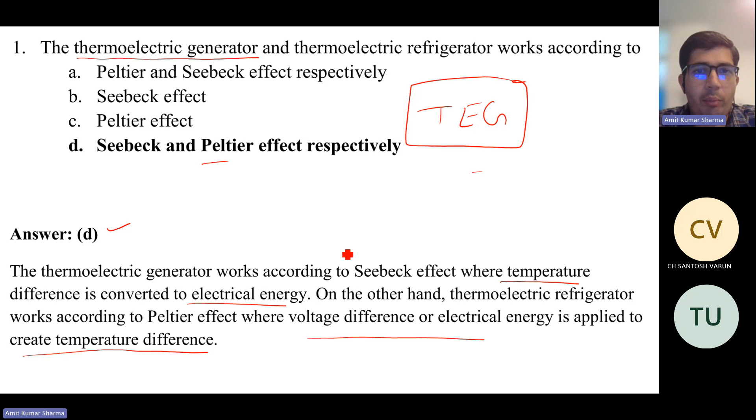On the other side, in the Seebeck effect, we are generating electricity from temperature difference. If you want to look into more, you can go back to the previous week's classes where we discussed the complete theory of the TEG, thermoelectric generator. Okay.

Figure of merit Z for a TEG is a function of: the temperature difference between the hot and cold side, the material properties, the magnetic properties, or all of the above. Let's think about it. So it's option B, material properties. Option B, it seems so.

But my doubt is, the figure of merit is the ratio of the Seebeck effect to the summation of the thermal conductance and the resistances, right? If that is the case, we'll have geometry also as one of the functions. In resistance, we'll have resistivity into length by area. So I think geometry should also be there, but in the options it's not provided. Am I right or not? Correct me if I'm wrong. I don't remember the exact formula for the figure of merit. Okay, no issue.

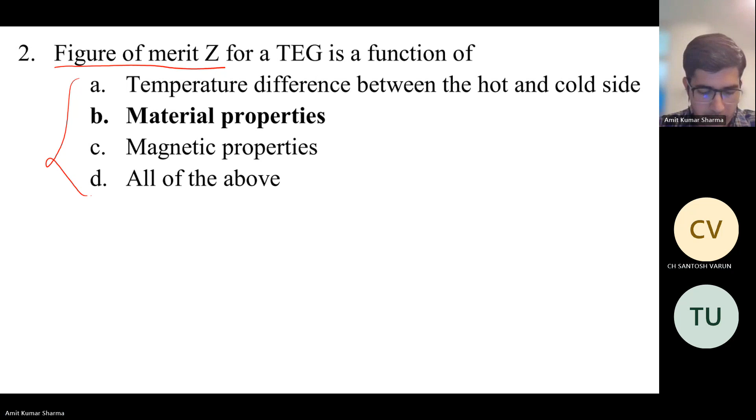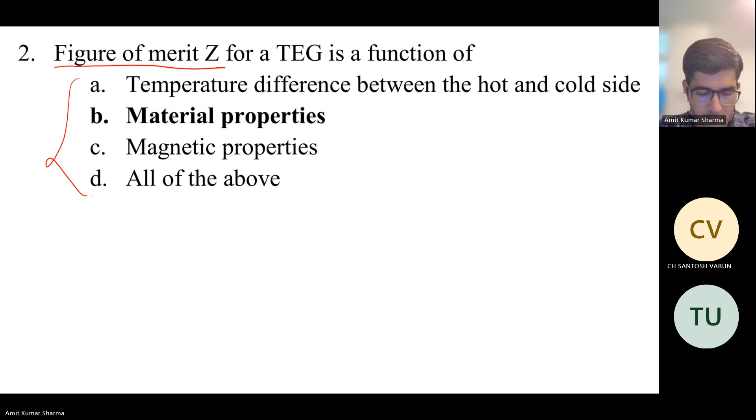Let's see the answer. The figure of merit is dependent on the thermal conductivity, Seebeck coefficient, and electrical resistivity, which come under the material properties. So option B is correct. And the thermal conductance and electrical resistance also depend on dimensions. So basically it also depends on the geometry. Okay.

So basically, they are taking the dimension property into the material part itself, because conductivity, Seebeck coefficient, and electrical resistivity come under the material properties, and these are dependent on dimension. So if we say material properties, we are considering thermal conductivity, Seebeck coefficient, and electrical resistivity, which already include the dimension. That's why they have not mentioned it separately, because it's an integral part of these.

So basically, the figure of merit Z you can consider like the efficiency for the TEG. It depends on the material properties, basically on thermal conductivity, Seebeck coefficient, and electrical resistivity. For the complete relation, refer to the class notes where you can see the complete derivation. Come to the next question.

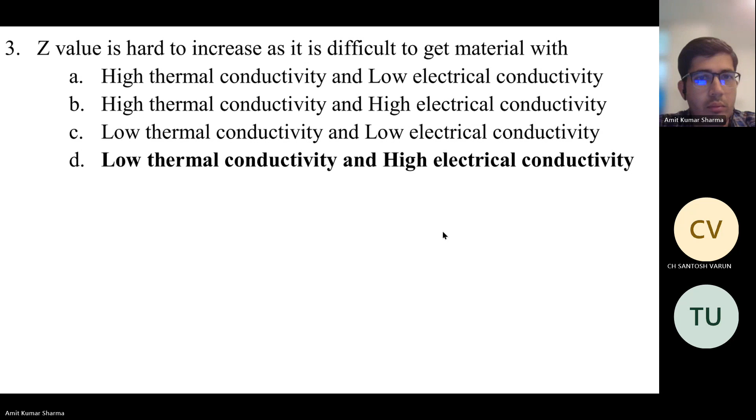Okay. So the answer is D, because the expression for Z shows the electrical resistance and thermal conductance in the denominator. So the point to be noted is that electrical resistance and thermal conductance are in the denominator. So hence to increase Z, we need a material with high electrical conductivity and low thermal conductivity. Such materials are hard to find naturally.

Okay, so as these are in the denominator, if we want to increase Z, then we need a material with high electrical conductivity and low thermal conductivity. So the denominator value will decrease and Z will increase. Okay.

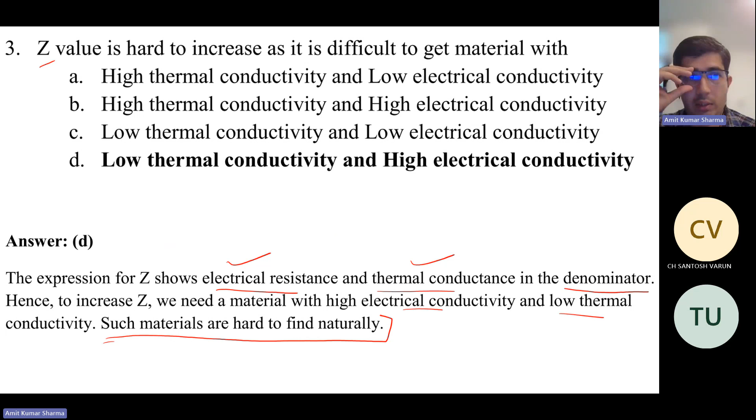If Rp and Rn are equal to 1.5 and 1 ohm respectively, then which of the following is true? Option A: external resistance of 2.5 ohm results in maximum efficiency. B: external resistance of 2.5 ohm results in maximum work output. C: external resistance of 2.5 ohm results in both maximum efficiency and maximum work output. And D: external resistance of 0.5 ohm results in maximum work output.

First of all, you should know what the external resistance formula is, basically what Rp and Rn are. So it should be 2.5 ohm, option A. Why? Because for maximum efficiency, the M value, the ratio of the external resistance to the resistances of the P and N semiconductors, should be equal to 1. So RL should be equivalent to Rp plus Rn. That is 1.5 plus 1, it's 2.5. Yeah, nice. Let's wait for maybe 1 minute if anybody else wants to answer or discuss it.

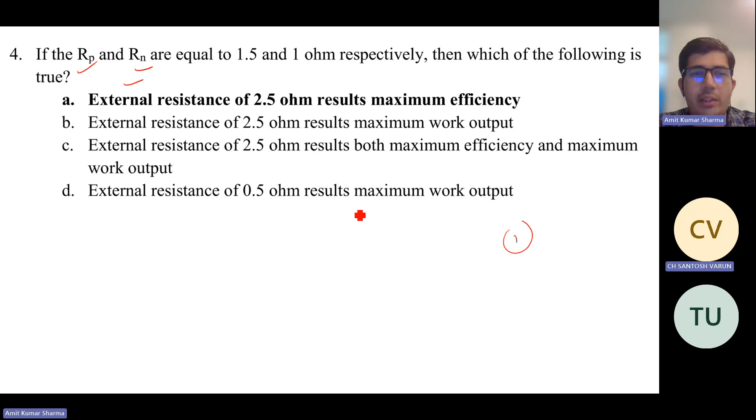Varun, when is the exam? Do you have any idea? It's on October 28th. Okay, October 28th. It's like 5 more weeks to go. It's like a 12-week session, I think, right? Yeah, 12-week session, and at the end I will take one more revision class to sum up all 12 weeks. In that, we will discuss maybe some concepts, and we can also discuss something else. So after 12 weeks there will be one more class. Okay. By then we should be ready with all the things. All the first weeks are gone already, so we should recap. It's a mechanical thing, it's fine. But after week 8, it's completely new concepts again.

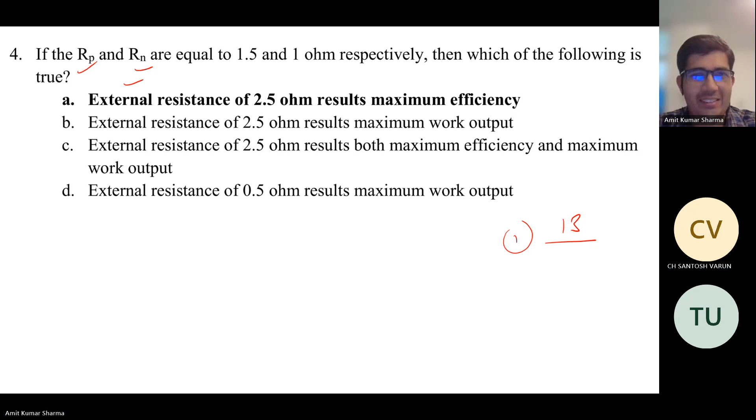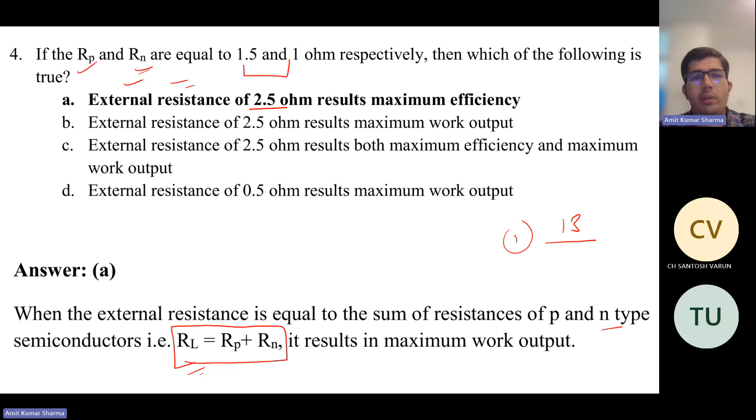Okay, let's see the answer. So the answer is A. Basically, when the external resistance is equal to the sum of the resistance of the P type, that is Rp, and N type, that is Rn, so RL equals Rp plus Rn, it results in maximum work output. So for maximum work output, the external resistance should be the sum of the P resistance and N resistance, and that will result in maximum efficiency. So it will be 1.5 plus 1, 2.5. So it will deliver the maximum efficiency.

The efficiency of an MHD process is limited by: we have 4 options: length of the duct, ionization potential of the gas, below 2000 Kelvin the gas molecules become neutral, thermal conductivity of the gas.

Oh, I think this question is entirely out of my box now. Yeah. So MHD is basically a magneto-hydrodynamic generator. It's quite new for me also, actually. I should have watched those videos and come to this session, but due to the time constraint, I was unable to manage today. So basically, MHD is a magneto-hydrodynamic generator. Okay.

So at the end of this class, we are having around 10 questions. After that, we will discuss all these technologies that have been taught in the class. Basically, just go through it.

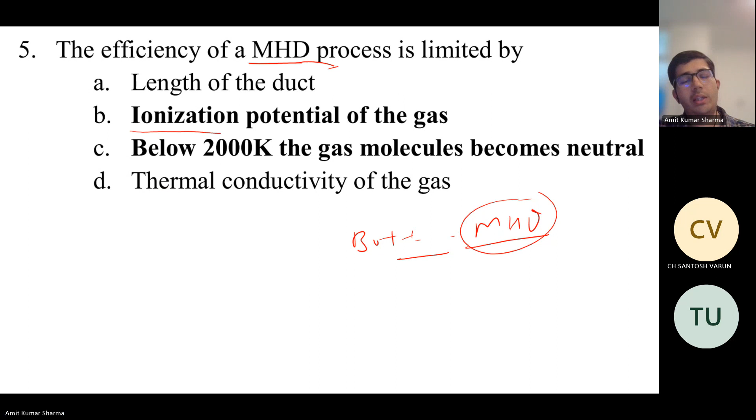After that we will use that gas, or you can say that heat, in the boiler to generate the steam and further to run the steam turbine or gas turbine or any other cycles. So basically the main funda of why it is coming in the waste heat recovery topic is because today we have furnaces that can go up to 3000 Kelvin or very high temperature, but the turbine inlet has some limits.

Okay, so the inlet stream going to the turbine, or to any other equipment, also has some temperature limit due to metallurgical conditions. We cannot go beyond maybe 1500 Kelvin or 1900 Kelvin like that. But in the furnace, we can go up to 3000 Kelvin. We have those furnaces available in the market. So that's why it is used as a topping cycle.

So first we heat our gas to a very high temperature, then we put the MHD, and that gas will go through the MHD and generate some electricity. After cooling to the required temperature, it will go to the other cycle. In this way, we can recover the energy that can be converted into electricity. That's why it is coming under the waste heat recovery topic.

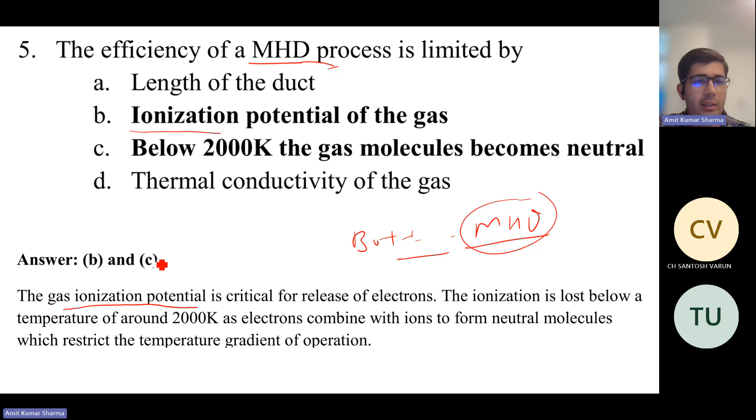Let's see the answer. The gas ionization potential is critical for release of electrons. Okay. The ionization is lost below a temperature of around 2000 Kelvin as electrons combine with ions to form neutral molecules, which restricts the temperature gradient of operation. So basically, for this system to work, we need ions, not complete molecules. And ions will be generated if the temperature of the gas is more than 2000 Kelvin, or nearly 3000 Kelvin. So we require very high temperature for this.

Okay. So the efficiency will depend on the ionization potential of the gas, and below 2000 Kelvin, the gas molecules become neutral. If this is the case, then the efficiency will come to zero or the system will not work. So B is also very important, because this is the potential that defines the efficiency of the MHD process. So options B and C are correct.

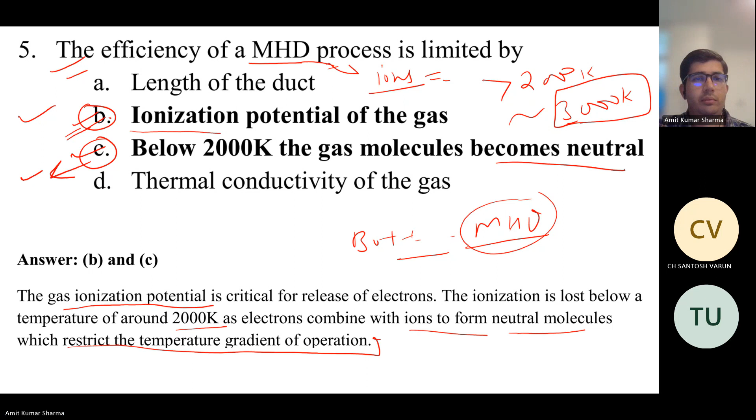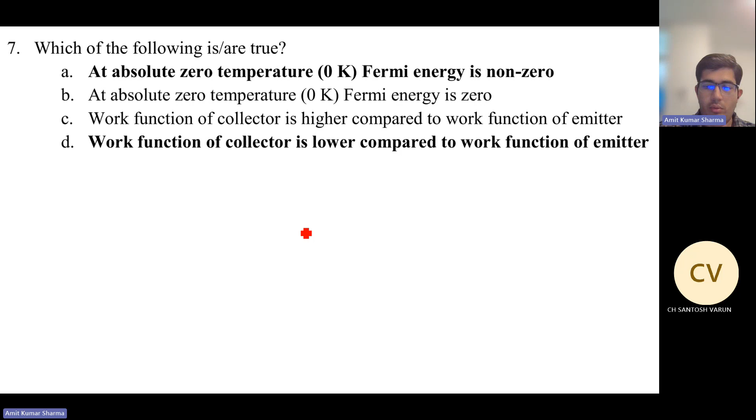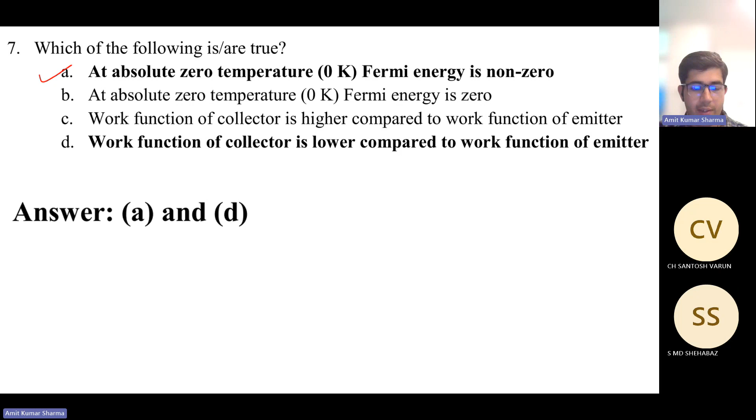Okay. So basically, Fermi energy is a concept of quantum mechanics referring to the energy difference between the highest and lowest occupied single particle states in a quantum system of non-interacting fermions at absolute zero temperature. So at absolute zero temperature, is Fermi energy zero or non-zero? See the answer. Fermi energy is non-zero at absolute zero temperature. So option A is correct. It will be the energy of the highest occupied single particle state at 0 Kelvin.

And the work function of a collector is lower compared to work function of emitter. So if there is a collector and there is an emitter, then the work function of the collector is lower compared to the work function of the emitter. Okay. Let's go to the next question.

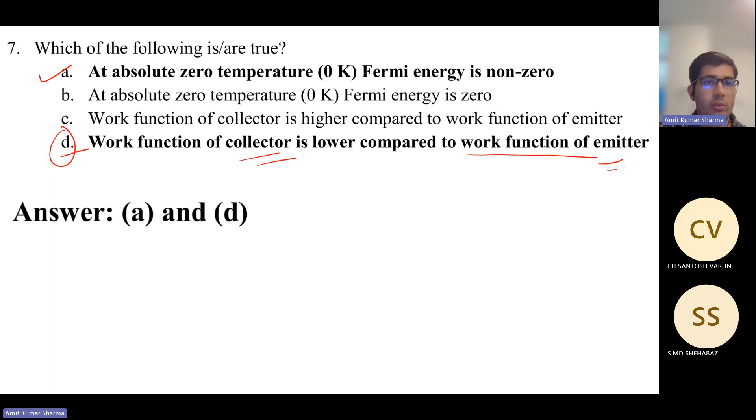In a power plant with hot gases coming from combustor at 3000 Kelvin, one can use an MHD, a TPV, and a TEG. Before using the gas in the steam generator, what should be the order of these devices along the hot gas path? Very good question. Take 2-3 minutes to think about it. Sorry to disturb you, but what is TPV? TPV is a thermophotovoltaic energy converter, or you can say energy conversion system.

So TEG we already know, thermoelectric generator, and MHD we already had previously, magneto-hydro, what is the name? I also forget. Magnetohydrodynamic, yeah. So as you said, MHD should be active at greater than 2000 Kelvin only. As the energy is around 3000 Kelvin, we can go with the MHD option first. I'm sure about it, so it should be D. As you said, only above 2000 will the activation happen. Yeah, about 2000 only.

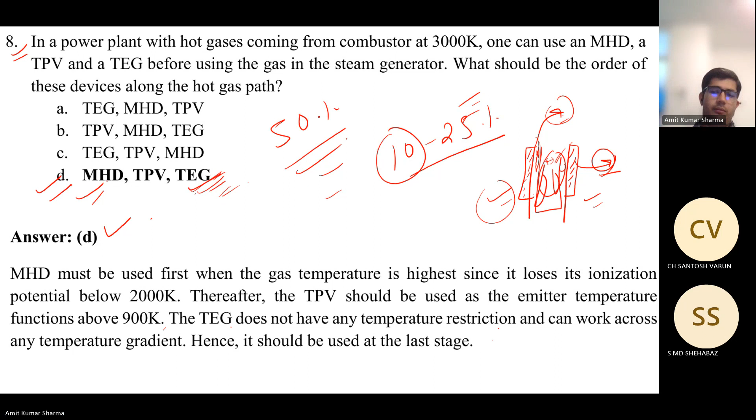So that's why they are putting so much money to come up with a design that can go up to 50% of efficiency. So it's like cook stove efficiency you're talking about. Yeah, cook stove efficiency. So today, if you go into the market, there are multiple designs available for cook stoves, but they are very costly. So the normal common man cannot afford that. So still we need so much intervention in this cook stove area actually.

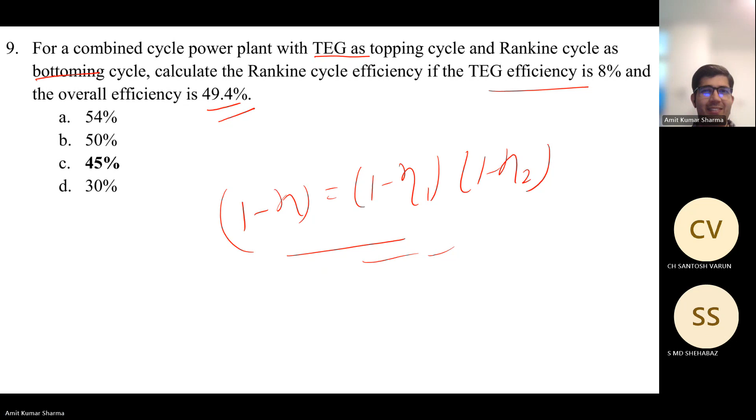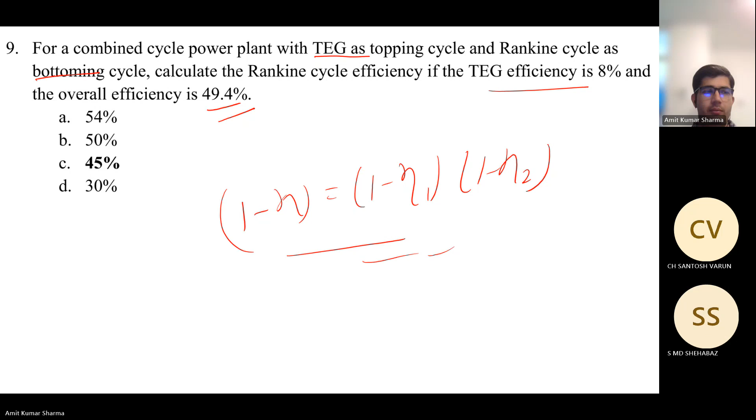Okay, so let's see the answer. The answer will be 45%. So here overall efficiency is 49.4%. So it will be 1 minus 49.4 equals 1 minus 8 times 1 minus this. So if you solve this, then you will get the answer of 45%.

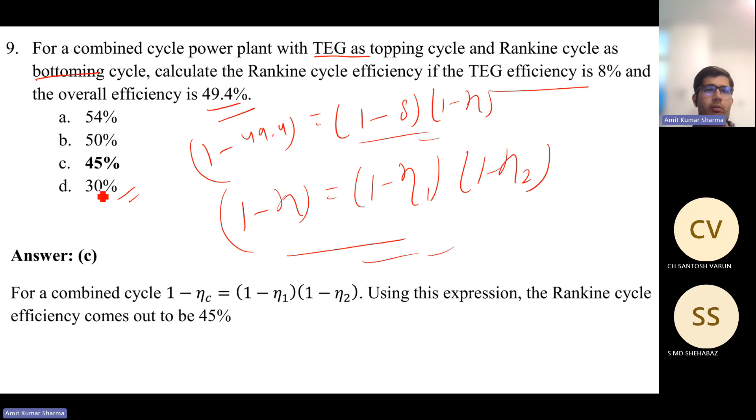A single device has a conversion efficiency of 15% over the available temperature range. Assuming efficiency to be proportional to temperature difference, what should be the resultant efficiency of a cascaded system having 3 such devices at equal temperature gradients? Okay, let's take 2 minutes. So basically, we are having some available temperature range, and if we are using only a single device, the efficiency will be 15%. And now you can assume the efficiency to be proportional to temperature difference. So what should be the resultant efficiency of a cascaded system having 3 such devices at equal temperature gradients? Now what will be the efficiency?

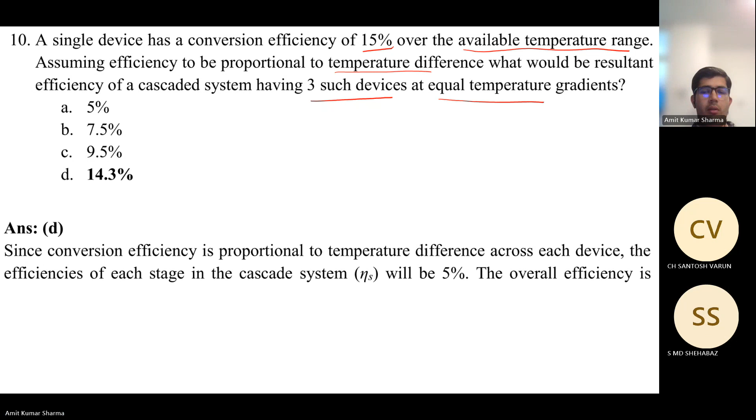Okay. So the answer will be D, 14.3%. Since conversion efficiency is proportional to temperature difference across each device, the efficiency of each stage in the cascade system will be 5%. So the overall efficiency therefore will be 1 minus (1 minus η) to the power cube. So the efficiency of each stage in the cascade system is 15% divided by 3, or 5%. Because a single device has 15%, if we are converting it into 3 devices, we are taking 5% for each device. In that way, it is 5% for each stage.

Because for the same temperature difference, if the single device is operating, that will give 15% over the temperature range. If we are assuming 3 steps, now each step is 5%, 5%, 5%. But we are using 3 devices now, so that will affect the overall efficiency. Got it.

Okay. Okay, sir. Okay, got it.

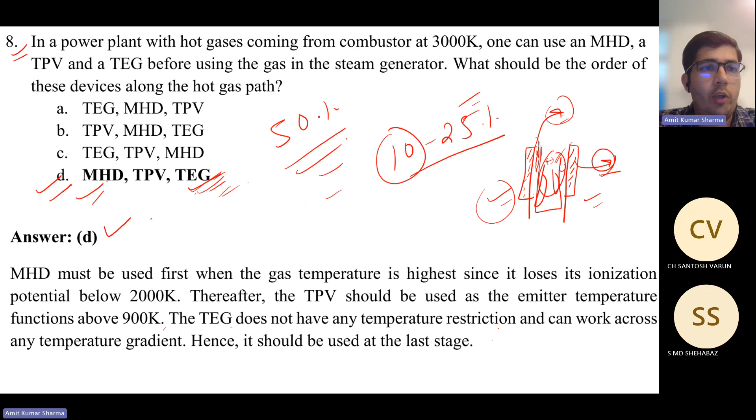So we have seen 10 numericals today. So I think first is the thermoelectric generator. Okay. If you have any doubt, let me know. After this, we are going to discuss some concepts.

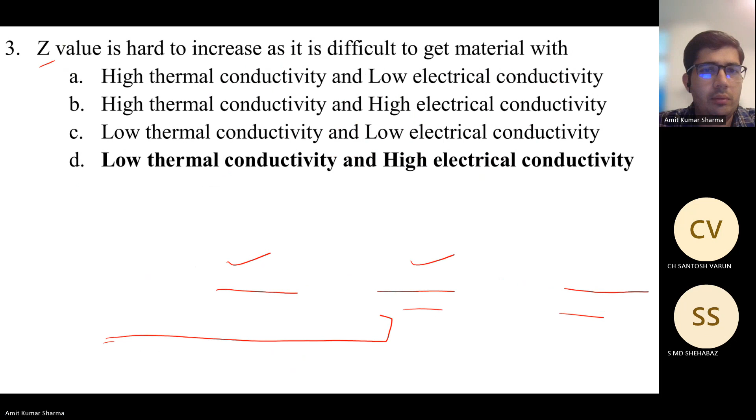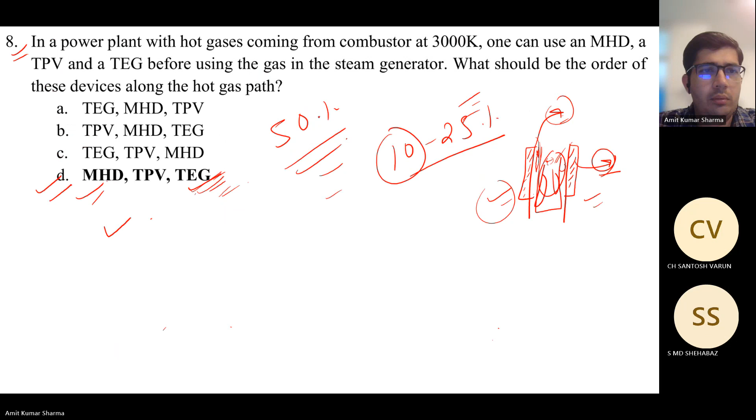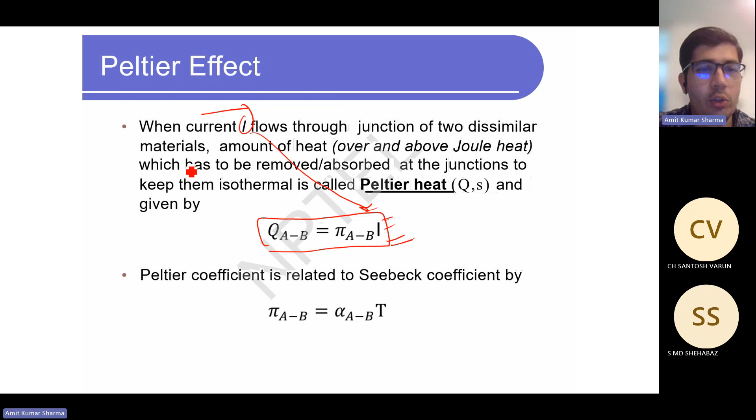Flows through junction of two dissimilar materials, amount of heat over and above joule heat, which has to be removed or absorbed at the junction to keep them isothermal, is called the Peltier heat. And this Q AB equals pi AB I. The Peltier coefficient is related to the Seebeck coefficient by pi AB equals alpha AB into T. Absolute temperature of junction.

So I think it's important. Maybe there can be a question in your assignment or your exam on how they are related actually. So they are related with the absolute temperature T. So the Peltier coefficient equals the Seebeck coefficient into T.

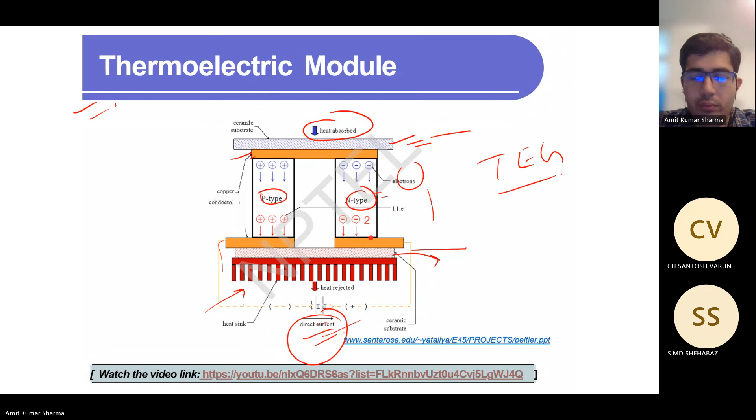So this is thermoelectric electricity and energy conversion. You can see the p-type, n-type. So here we are generating the electricity, and here we can see we are providing the voltage to make this difference.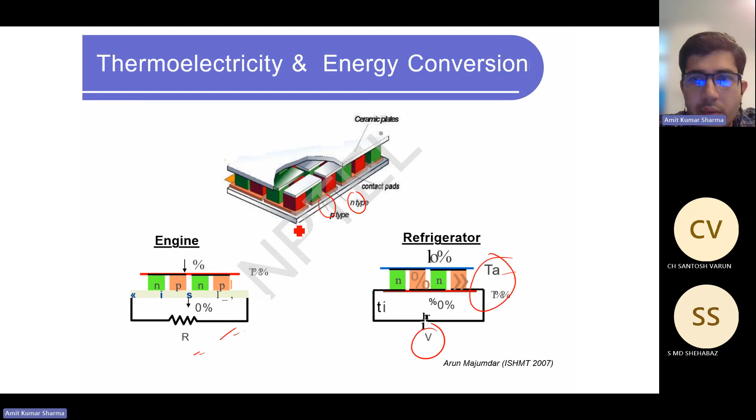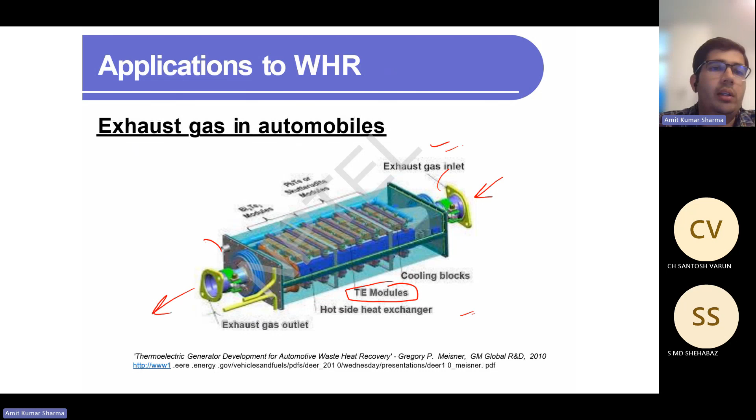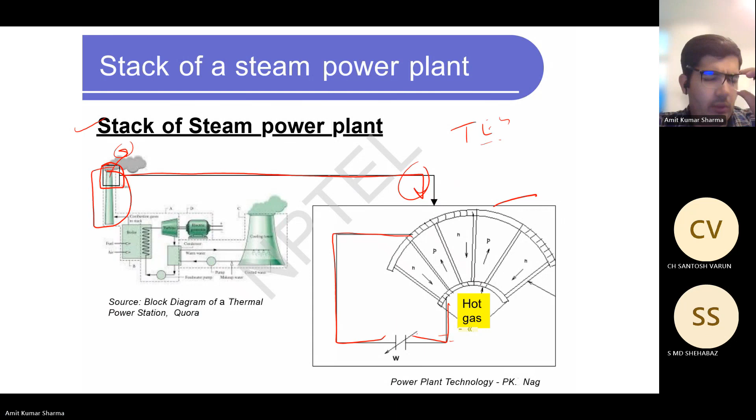So TEG is having very wide application. We can put it in the stack of a steam power plant, we can put it in automobiles. And as I already told you, we are putting it on the conventional gas stoves, which we can say chulha in Hindi. So we are also putting this on various things to recover the energy from temperature difference.

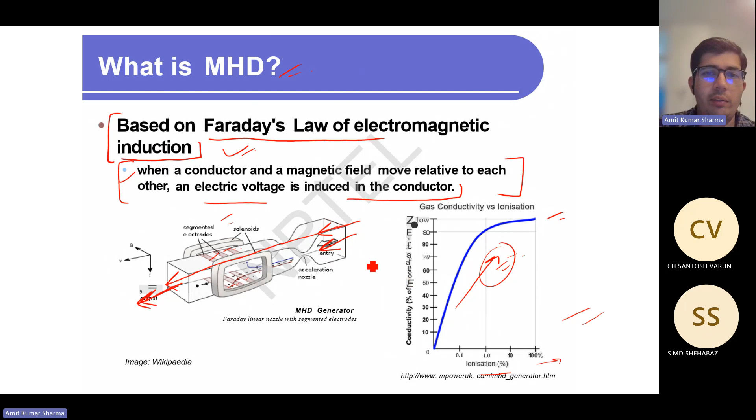So it uses the hot ionized gas as the moving conductor. As I told you, the gas will come to the entry point and move through it, and it will be at very high temperature. The gas molecules will act as a conductor, because at very high ionization, the conductivity of the gas increases to very high limits.

So first the gas is heated to a very high temperature, around 3000 kelvin. Then valence electrons of the excited atoms move to the higher quantized orbits. Ultimately, at certain energy levels, they fly off to become free electrons. Then the gas becomes conducting. The normal gas would need very high temperature to reach ionization potential.

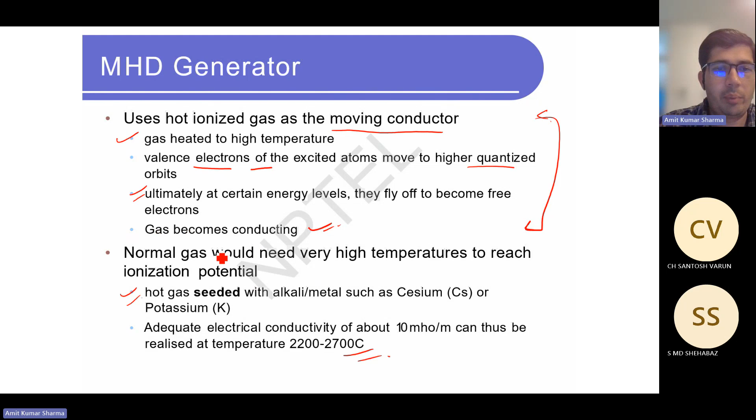So hot gas is seeded with alkali metal such as cesium or potassium, and adequate electrical conductivity of about 10 mho per meter can thus be realized at temperatures of 2200 to 2700 degrees centigrade. So basically, to provide the needed conductivity, or the needed ionization, we seed the gas with alkali metal such as cesium or potassium.

Here we can see an example of MHD in waste heat recovery. This is a steam turbine cycle. There is a steam turbine, evaporator, economizer, compressor, everything is there. But here's the topping cycle. In the topping cycle, this section is the MHD duct, and the fuel is coming through here. The gas will be in ionized form.

There is a magnetic field. It will generate the electricity, and we are having an inverter also, connected to the steam turbine. We are getting electricity from the steam turbine and from the MHD also. After this, the gas goes to the boiler, evaporator, and economizer to generate the steam. So first we apply MHD, after that the bottoming cycle. The steam turbine is in the bottoming cycle, and MHD is in the topping cycle.

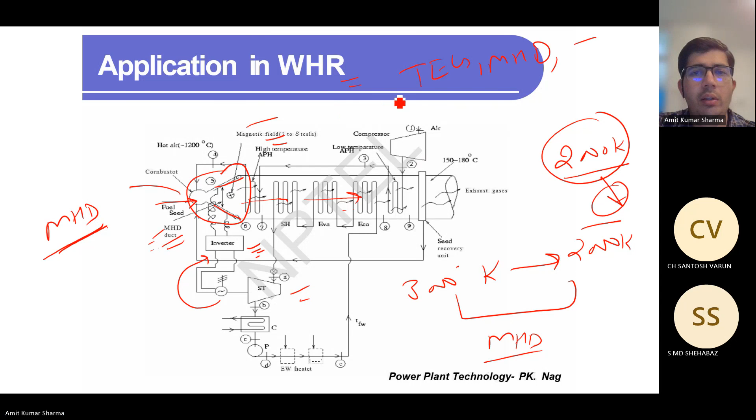I think we have TEG, we have MHD, we have TPV. So suppose first we have applied the MHD in the range of this temperature. Now the temperature is at 2000 Kelvin. But still, if we want to generate the steam, steam can be generated at 1000 Kelvin also, because 1000 Kelvin is still a very high temperature.

You can generate steam easily because for steam, you only need 100 degree centigrade. For superheated steam, maybe for high quality steam, you will require 200 degree centigrade. Okay, but 1000 Kelvin is a very high temperature.

So we can also employ the TPV if you are having sufficient resources, you are having access to the heat available, or you are having some space to put the TPV system, or you can connect this TPV to your system. It depends, but still there is a chance. So in this way, we can utilize the maximum waste heat recovery.

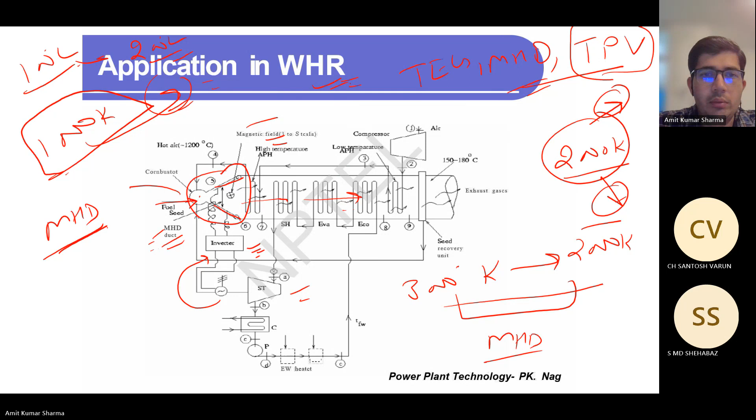So there are a few points that restrict MHD power output. At temperatures less than 2000 Kelvin, electrons combine with ions to form neutral atoms. So below this temperature, the electrons combine with ions and form neutral atoms.

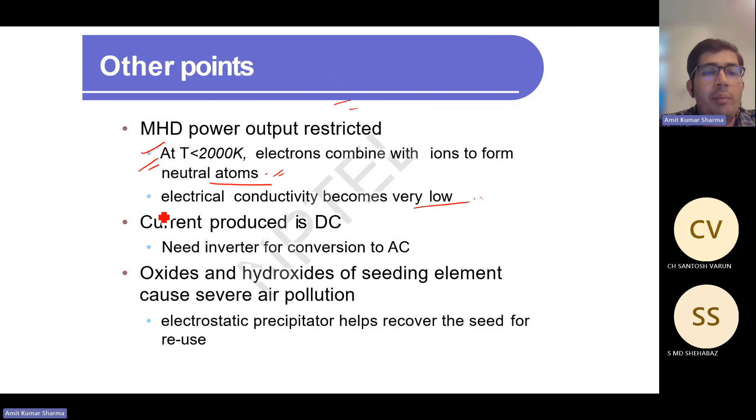So now the gas conductivity will decrease. Gas will not behave as a conductor. The conductivity will become very low, and the MHD will fail because the electrical conductivity becomes very low. Current produced is DC. So it produces DC current, so we need an inverter for conversion to AC current.

Oxide and hydroxide of the seeding element cause severe air pollution. So we are also using some seeding element to ionize the gas, so they are creating severe air pollution. An electrostatic precipitator helps recover the seed for reuse. So we can use an electrostatic precipitator.

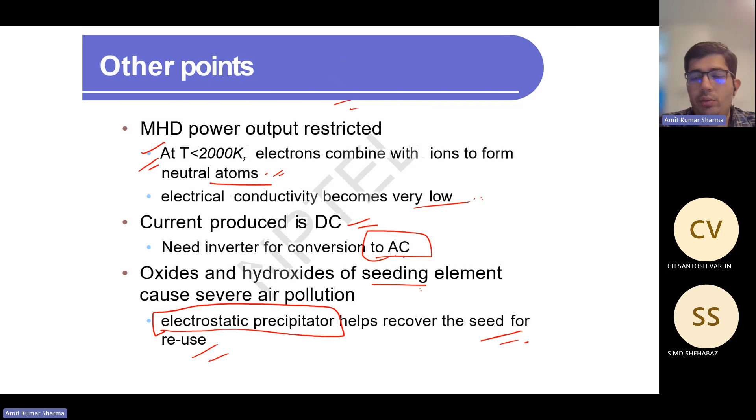Before releasing the gas to the atmosphere, we can use this electrostatic precipitator to recover the seed material for reuse. So there is also another technology, the thermionic generator.

So in the thermionic generator, we have an emitter and a collector. Okay? And the thermal energy is coming to the emitter. So this is the direct conversion of thermal to electrical energy. There are two electrodes, emitter and collector. The emitter is heated to a sufficiently high temperature to emit electrons. So the emitter will basically be heated to a very high temperature and will emit the electrons.

The collector, at a significantly lower temperature, receives the emitted electrons. So this collector will receive the emitted electrons. This emitter will emit the electrons at very high temperature. The space between the electrodes is normally filled with a vapor or gas at low pressure. So you can see this space will be filled with vapor or gas at a low pressure.

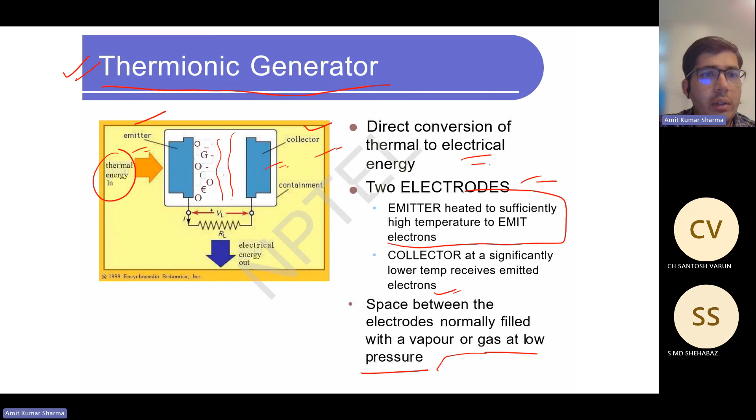And they are both connected through the resistance to the external circuit, where we can generate electricity. So basically this is the thermionic generator. Now, the thermophotovoltaic generator.

So this thermophotovoltaic generator works on the same principle as the traditional photovoltaic PV system. There is a PN junction that absorbs the optical energy, generates and separates the electron hole pairs to generate electricity. So it's similar to the PV junction. It absorbs the optical energy, generates and separates electron hole pairs to generate electricity.

The different source of optical energy is emission of photons from an emitter surface at high temperature. What is the difference? In PV, we are using solar radiation, but here the optical energy is emission of photons from an emitter surface at high temperature. The optical energy we are taking from the photons from an emitter surface that is at high temperature.

So the TPV system consists of an emitter at very elevated temperature, around 900 to 1300 degrees centigrade, a photovoltaic power converter, and additional components like filter, concentrator, reflector, etc. There's an emitter that is a solid material or engineered surface.

Thermal emission characteristics, the wavelength, polarization, direction, tend to be matched to the absorption characteristics of the PV cell to minimize losses. So there should be a match of the properties so that we can minimize the losses. Filters and surface treatment to get selective emission are often used for optimization.

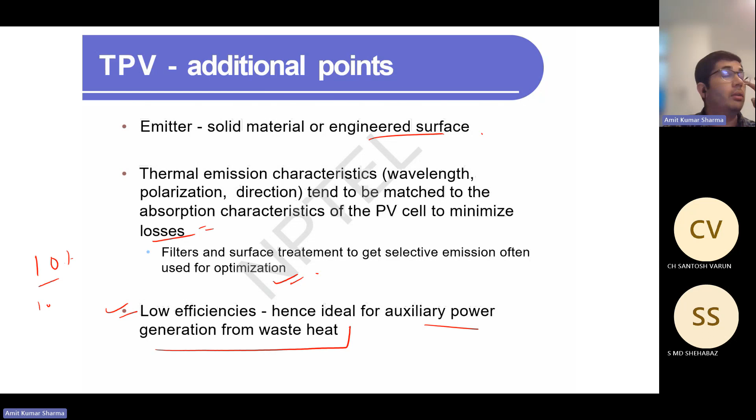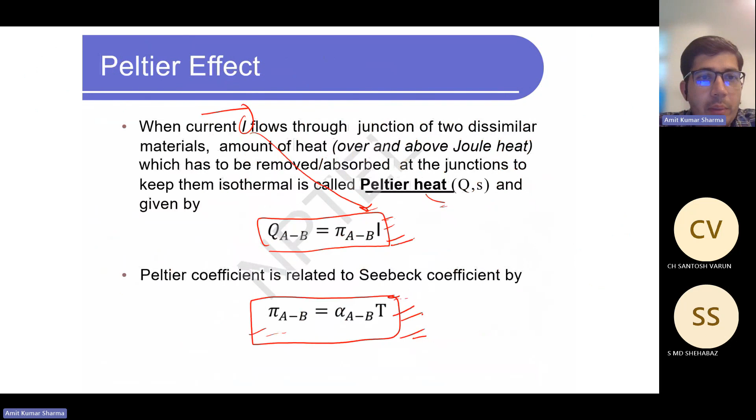So these are the systems for today's class. But still we have half an hour, so maybe we can revise or you can ask something.

Varun, Shehabaz, do you have any doubts? Sir, for now, no, because the questions are clear. Yeah, this topic is actually very new for mechanical engineers. Yeah, that's the thing. Mainly I should cover that MHD so that again I can be into the form again. It's fine. Yeah.

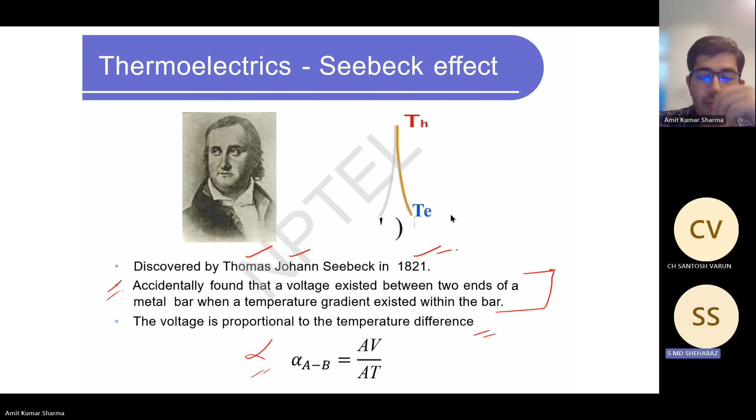So anything else, Shehabaz, from your side? Do you have any doubts? I think Shehabaz is having some network issue. His voice is not clear. Okay. So we can discuss something. We have half an hour. If you want to discuss anything regarding the energy systems, the floor is open.

So Varun, basically, in which company are you working? I forgot the name actually. I'm working in a Tata company. It's one of the Tata companies. We design these power plants and all those things.

You can share your experience, like you are designing power plants, you are working in this sector. It will be good to know how you can put these waste heat recovery systems in your plant, and what current technology you are using in your systems. Yeah. So actually I've been working there just 1 year. It's a new field for me. But this morning I was just seeing waste heat recovery.

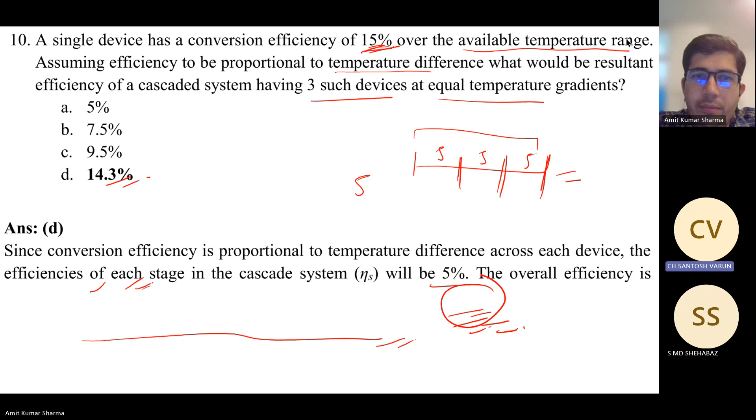I have seen one of these deaerator storage tanks where you'll be venting out some excess steam. On the vent line they have kept a small vent condenser. The deaerator vendor said a small condenser should be kept, which will heat the incoming water going into the deaerator again. In the deaerator you have to heat the water so that at elevated temperatures we can remove the non-condensable or dissolved gases.

So the water will be as pure as possible and we can use that water in the boiler for converting to steam, so that corrosion of the boiler tubes reduces. So I have seen that it's a small component, but they were not leaving even a small thing. The heat being vented out is used again. We are using some steam to heat the water, and that steam, being low density, goes up, so they were using that heat also. So many systems are adopted that way; they will not leave even small heat anywhere. But these are systems I didn't encounter anywhere, like these thermoelectric generators.

Yeah. The reason is that the technology is still at an early stage of TRL. They are still under development, and they are costly and the efficiency is also low. They are very sophisticated, and I think the ambient conditions also have some constraints. And cost is a main concern. So that's why they are used mostly in space industries, or only where other systems are not possible but we still need some energy.